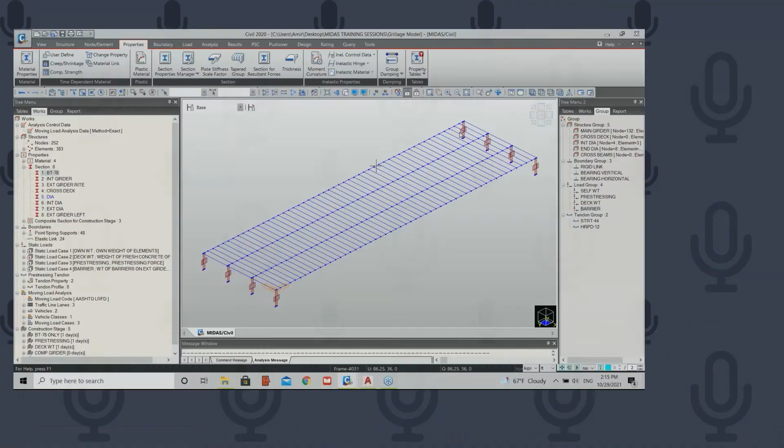All right, okay, thank you. So you can see my screen now? Yes, I can see your screen. Okay, so this is the first application that I want to talk about, and it's a very simple one. This way we can take the topic from simple models and move on to more complex models later.

So this is a bridge that I call an everyday bridge. It is basically a precast, pre-stressed concrete I-beam bridge. I want to focus the discussion of this model on the topic of construction staged analysis. I'm not going to go over every single definition in the model, but rather focus more on the construction staged analysis, how to build the stages, and what tips or things we need to include to make sure we have a correct definition for the construction staged analysis.

So this bridge basically consists of 4 bulb T girders. You can see this is the cross section of the bridge. Those are bulb T78 girders, and they are 4 girders spaced at 12 feet, and you have the concrete deck on top of that.

Of course, any finite element model has those steps - the basic steps you need to define for any model, including the materials for the model and the section definitions. For this span, for the deck, we have a 4,000 psi concrete material. We define this material here, including the modulus, the Poisson ratio, the weight, and the density. For the pre-stressed girders, we have a higher grade concrete material for the pre-stressing effect - 8,500 psi for this material. And I have a definition here for the pre-stressing strands used in the bulb T section, which is the grade for the pre-stressing material or steel used for pre-stressing.

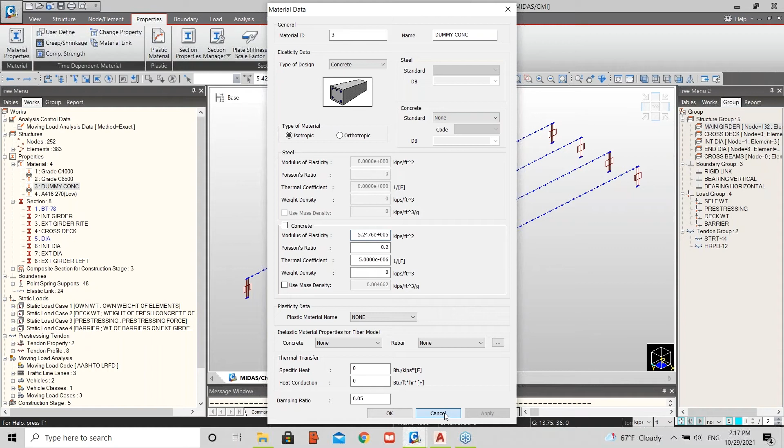Finally, I have a definition I call dummy concrete. It's no more than a concrete definition with a weight density equal to zero. I'm defining this because I'll show later in the model that this material can be assigned to any element when you want to include the stiffness of the element without including its weight. I'll describe this more as we move to the construction stages.

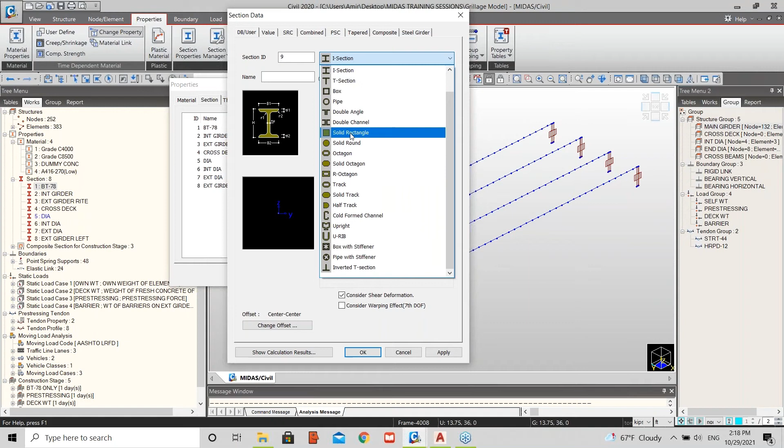For the section definition, we have a bulb T78 section, so we'll define the section for it. MIDAS has an extensive section library with all different types of sections included, from generic sections like steel, rectangular, and circular configurations, to steel encased sections where steel is encased inside concrete, with different configurations for I-beam encased in rectangular or circular concrete sections. There are also concrete filled steel tubes, which are popular for piles and other bridge elements.

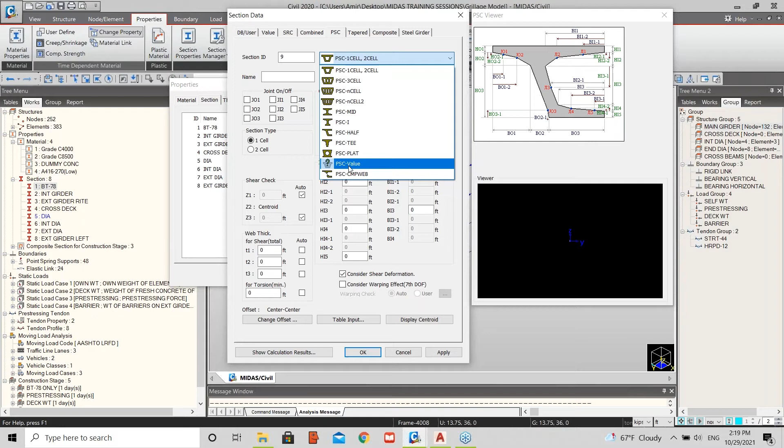Then there are combined sections, when you have two steel members combined together. The one we use most is the pre-stressed concrete section definition. This module is specific for defining box sections for bridges, including any number of cells, and can also define I sections or T sections, which are I-shaped pre-cast pre-stressed girders, or even any generic section where you input the properties directly, not covered by a particular embedded geometry.

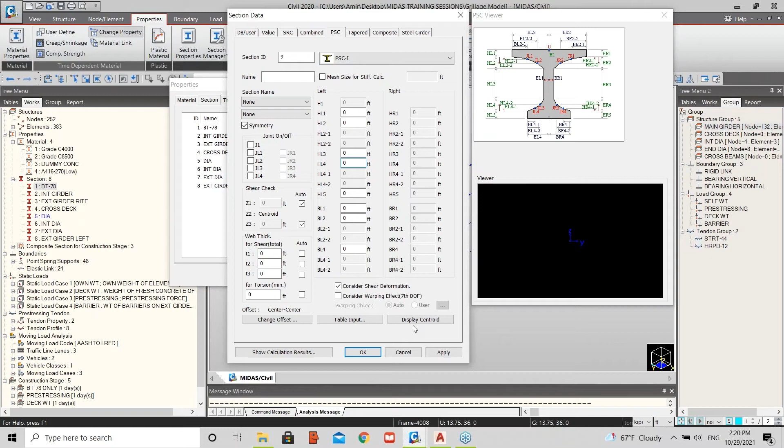For the bulb T78 I-beam, we usually use the I-beam section option. There's a guide figure with all the dimension definitions named, and all you need to do is input the numbers for the basic dimensions of the section, and that's how it's defined inside MIDAS.

Since those precast I sections will later have the deck or concrete poured on top, the two pieces become composite together. For defining a composite section, we go to add a section and select the composite section tab, which has different shapes including steel tubs or I-beam sections. For the concrete bulb T section, we use this one and define the properties for the slab, which are the basic dimensions of the slab and the haunch thickness.

Later, for the I section, you can simply import the bulb T section you defined earlier for the girder by itself, and that's how you end up with the composite section definition for the inner girder.

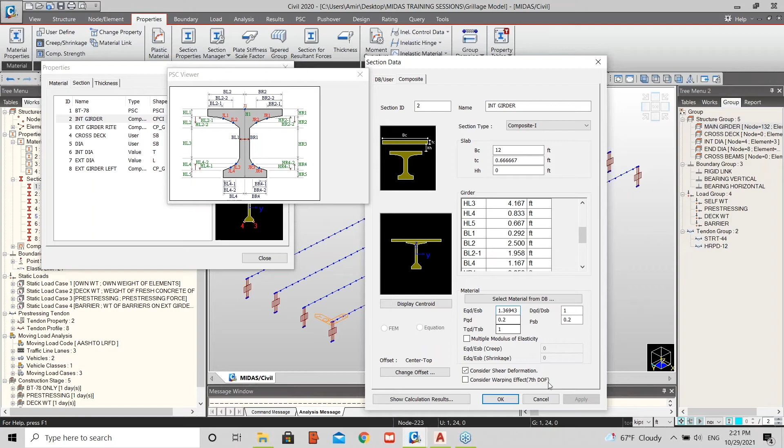One important aspect is to include the modular ratio, the ratio of the moduli for the two concrete materials - the concrete of the deck and the concrete of the girder. This ratio needs to be included because when MIDAS automatically calculates the properties for the composite section, we have to make sure the modular ratio is included in the calculation, since those are two different materials with different properties. To get the correct stiffness and correct inertia, we want to make sure to include this ratio.

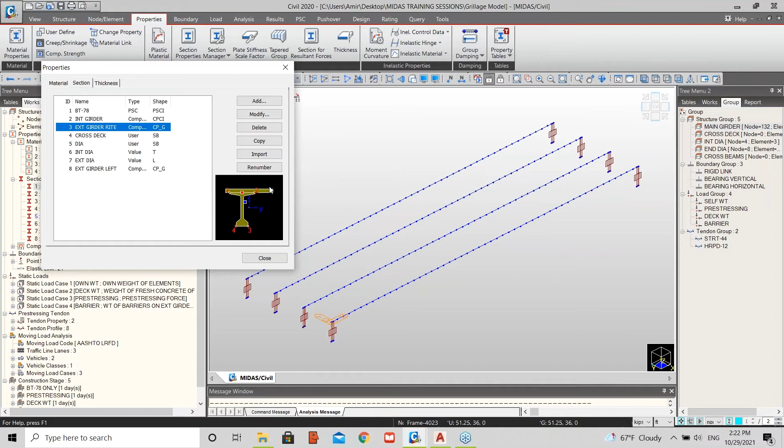This definition can be used whenever you have a composite section that is symmetric, like the case for the interior girder, where the deck is symmetric at the center line of the girder. But when you get to a case like the exterior girder, where the overhang length is different from the spacing of the bridge, you end up with an unsymmetric section.

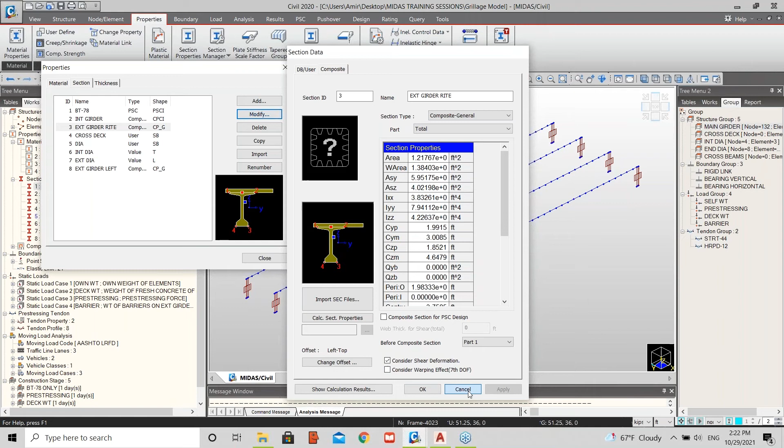This can also be defined inside MIDAS, as a composite general section. This option provides the capability to define any section with unsymmetric geometry, and it can be done in conjunction with the section property calculator tool inside MIDAS. Since I received many requests about this definition, I wanted to go over it quickly with you guys.

I think I had one here. Yes.

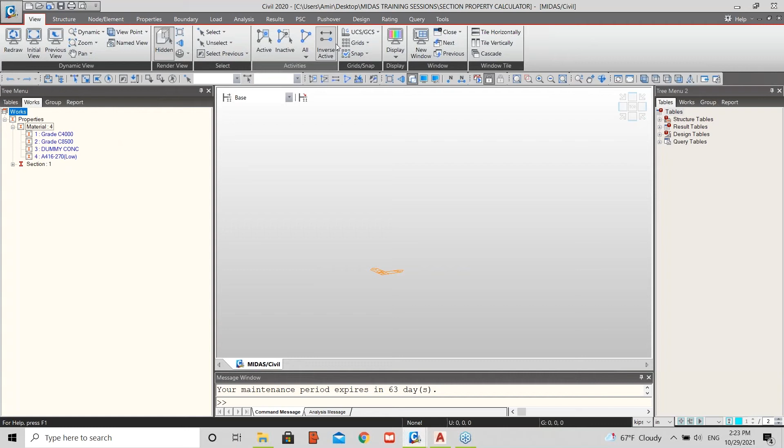Let's quickly go over how to use this section property calculator to define a section with irregular, unsymmetric dimensions. Let's say we have a MIDAS model. The first step is to define the materials inside the model, then go to AutoCAD and draw your section with the irregular or unsymmetric geometry that you have.

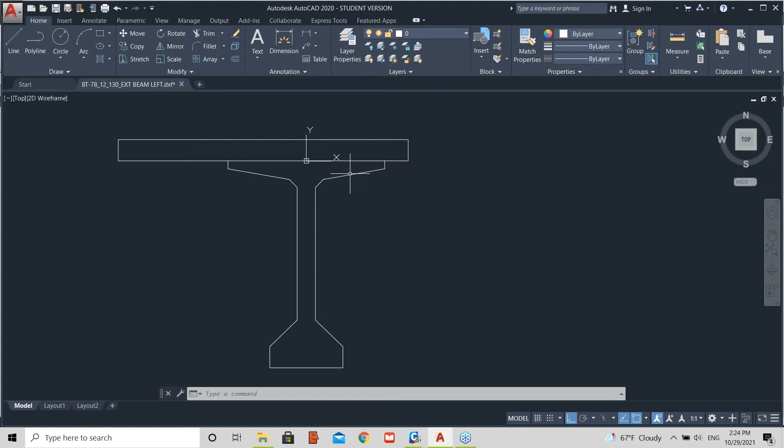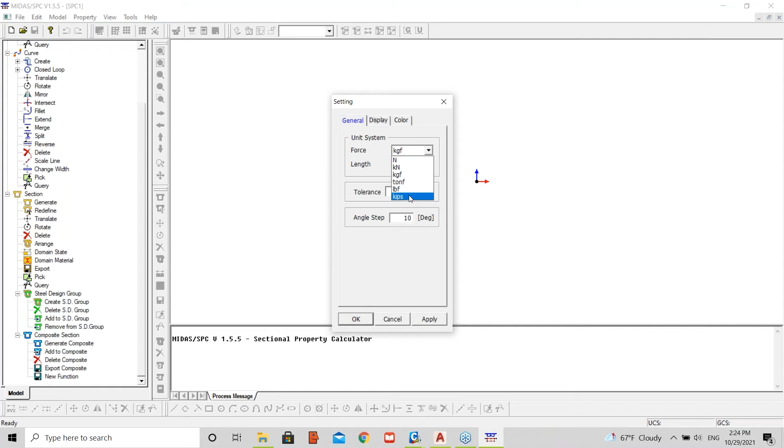Here I drew the girder and the deck together in AutoCAD and saved this as a DXF file. The important thing when drawing the section is to make sure what units you're using. For example, I used inches everywhere to draw the girder and deck together. Then you need to set the units here correctly to match the drawing, and go to Tools, Section Property Calculator, the brilliant tool inside MIDAS that you can use to create any geometry you need. Just set the units correctly, including kip and inch, and hit OK.

The other important step is to define the materials correctly, because this plays a role in calculating the properties and stiffness for the section later on. So we define the deck concrete material, just plugging in numbers as an example. We have a material for the deck, and another material for the girder, pre-stressed girder, including the modulus, Poisson ratio, and weight.

So we define the two materials we're using, and then you can simply import the AutoCAD DXF file, pick your DXF file, and hit OK.

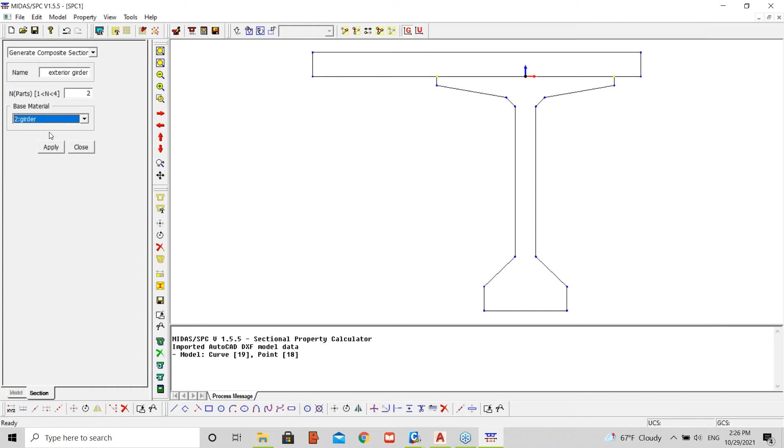This way you've imported the section inside MIDAS. Since this is going to be a composite section, you go to this tool, Generate Composite, and name it exterior girder. This consists of two parts: part number one is the pre-stressed precast girder, and part number two is the deck on top. The base material for the section will be the girder material, since that's the dominant material of the section. Then hit apply.

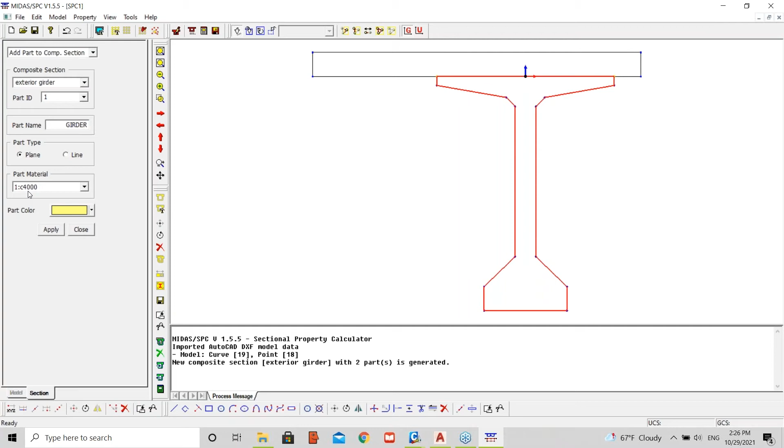This tells you the section has been generated. Then add to composite - that's the exterior section, so part number one is the girder, pre-stressed girder. All you need to do is pick the shape for the girder, making sure you select the correct lines, then pick the material for the girder, the pre-stressed one, and hit apply. Then go to part number 2 definition, which is the deck definition, and name it deck.

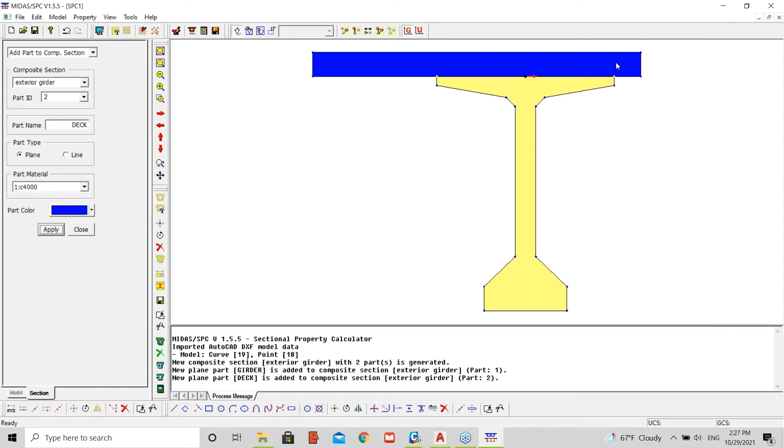Then you pick the deck and choose the correct material, and you can even choose a different color. I think I made a mistake in my selection, so we need to make sure we don't include wrong lines - just the correct lines in the selection - then hit apply. This way MIDAS understands that this portion is the deck portion of the section.

Then you go to Property, Calculate Composite Property, and put the mesh size. Basically, what this section property calculator does is discretize the section into small elements, one inch by one inch in size, and it calculates the property for every single part by itself and the property of the composite section as a whole.

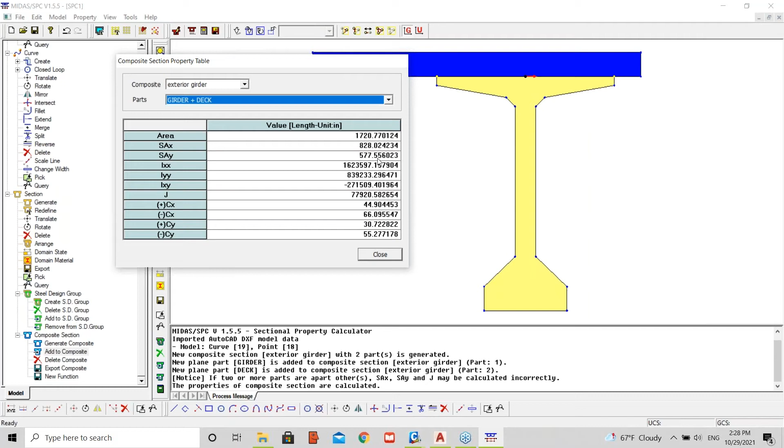If you display the properties for the section, you'll see the girder property - this is the yellow portion representing the girder - with area, inertia, and all different properties calculated. That's the deck properties, representing the concrete slab on top, and that's the girder and deck together - the composite section properties. This is how you define sections with irregular geometries inside MIDAS.

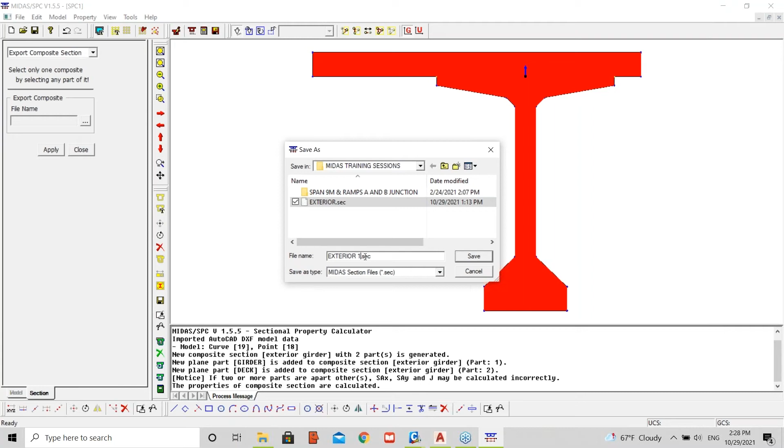And the last step will be how to export this composite section. You need to hit on export composite section, select the entire section, and name the file exterior, let's say exterior 1 or something, with the extension .sec, because that's the extension that's going to be saved inside MIDAS.

And after you do that, you can also save this section in SPC, the section property calculator extension, and that's how you save it inside MIDAS.

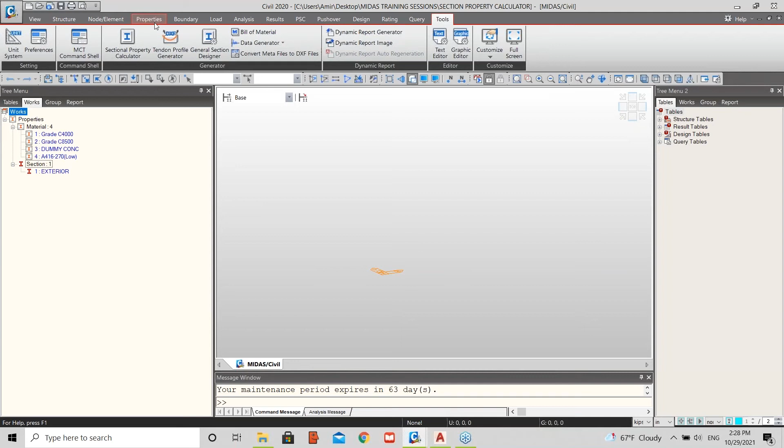Then later on, when you get to define your section, it is very simple. You go to define your composite section, hit on composite, and basically name your section. Choose the correct type, which will be the general one, because now we are defining a general section that has an irregular geometry. Call it whatever name you need, and then you import your SEC file, and that's the file that is saved.

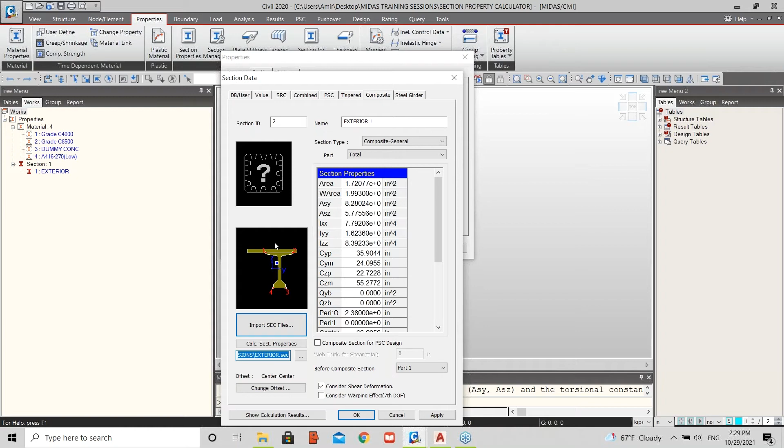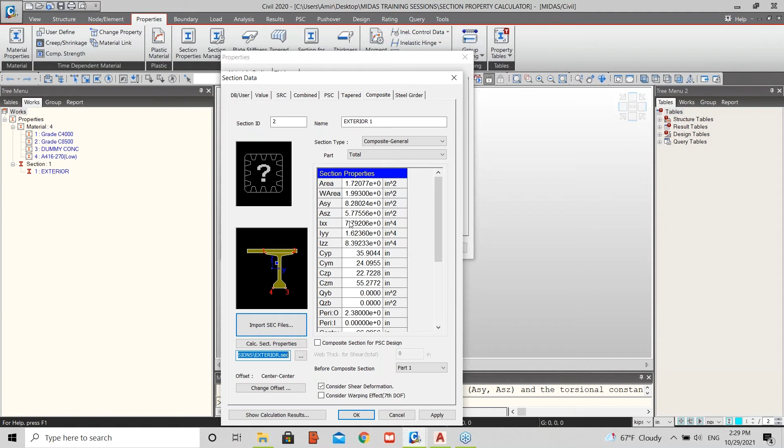And this way you end up with the section defined inside MIDAS. So MIDAS reads the section property calculator file, imports it with all the properties. Just make sure you are keeping the correct units while you do this import process, so you import the property with the correct dimensions and section properties as well. This way you can have your section defined inside MIDAS.

So that's a way that you can define irregular sections. I just wanted to highlight this because I received some requests from people to go over this definition together. That was the way I defined those exterior girder sections for the model, the irregular ones, this way.

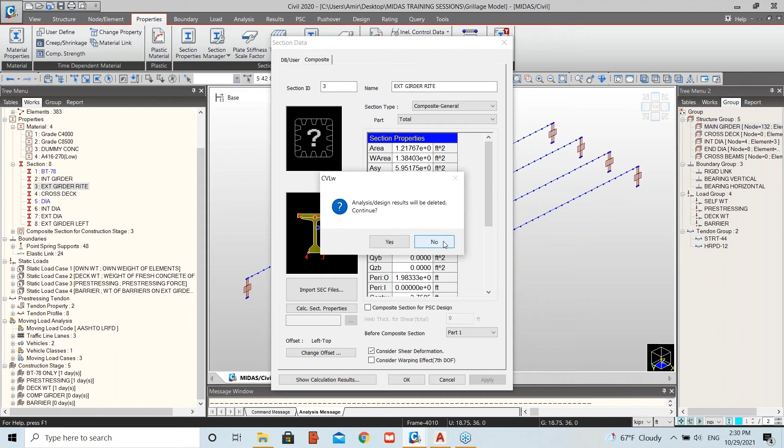And of course, we will have the definitions for the internal diaphragm and the exterior. So we need to make everything active, make sure we activate all the model. This is the interior diaphragm, just a rectangular section, and the exterior diaphragms, which are the external ones.

After we covered this part, we defined all the sections inside MIDAS. Of course, we can go and start defining the geometry of the model. For the geometry, you have tools to draw and create nodes with coordinates. If you hit on this, you can create all the nodes you need using coordinates, and create the elements by drawing the element joining from one node to the other.

So this is one way. And of course, when you create the element, you can pick the material and the section right away to define your materials and sections for all the elements. So that is a useful way to do it.

Or, of course, MIDAS also provides the option that you can import a DXF AutoCAD file. So you can draw the geometry for the span, including the main girders, the cross elements, the deck elements, the diaphragms, all different elements inside AutoCAD, and just import this AutoCAD file inside MIDAS. This way it can save you considerable time when building the geometry of the model, especially if this model has curved geometries or an irregular bridge model.

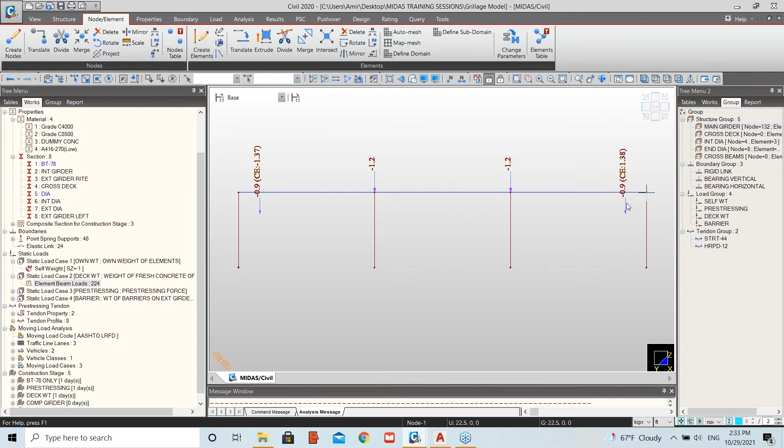Also, MIDAS has the option that you can define the load eccentric from the girder if needed. For example, for this particular case, the exterior girders, the deck is not symmetric with the girder, so we have some eccentricity that is applied here in the deck weight to account for this eccentric load.

The third load case created is for the pre-stressing effect, defining all the tendons or strands inside the model and adding the pre-stressing force in a separate load case. Finally, a load case is added for the barriers, which are the two barriers applied at the edges of the bridge.

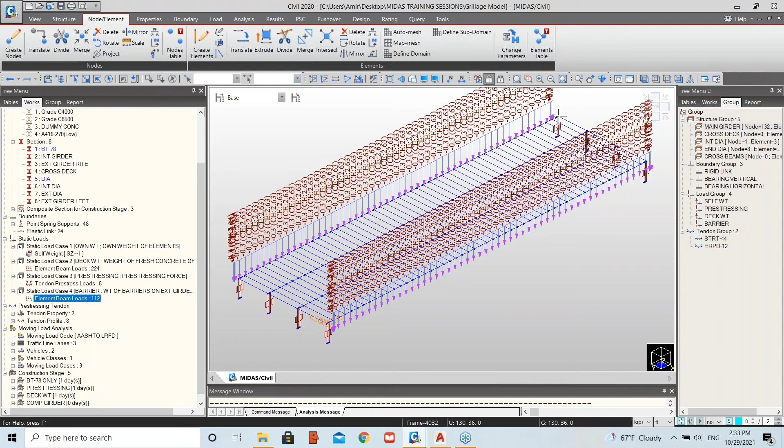The barriers are applied eccentric from the exterior girder because that is how they are applied in the actual condition. So that covers defining the load cases.

At this stage, you are just building the model: adding the materials, adding the sections, building the geometry of the model, building all the load cases, and also defining the support conditions, which is really important in any finite element model to make sure you have the correct restraints and links.

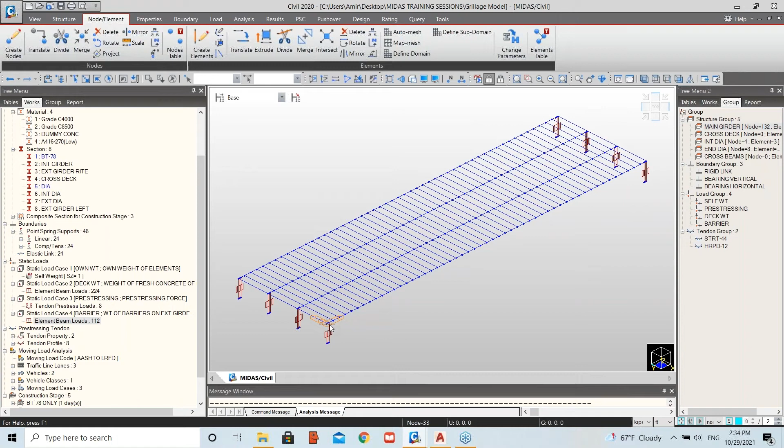For this particular case, since I'm defining the girders, I'm putting the frames at the top of the pre-stressed girder. So I had to define rigid links that represent the depth of the girder, with one node at the top of the girder and another node at the bottom of the girder.

These rigid links connect the frame element inserted at the top of the girder all the way down to the nodes which represent the support nodes. We usually use elastomeric bearings or some kind of bearings that have translational stiffnesses and rotational stiffness.

That's how we ended up defining the properties for the bearing. This comes from the type and size of the bearing and the modulus of the bearing material, which is how you calculate the stiffness for the vertical direction of the bearing.

I chose compression only to make sure the bearing does not operate under tension, because those bearings can only carry compression force. The only case where you can consider tension is if your bearing is anchored to the bent, which is not a common case and is done only in very specific situations.

Also make sure to define the boundary conditions, including the horizontal stiffnesses for the bearings in the two translational directions, X and Y, and any rotational stiffness you are interested in adding. You can add this in the boundary condition here.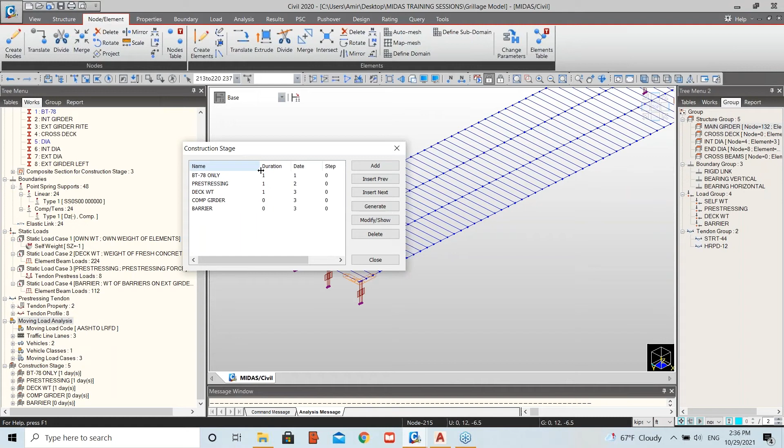Moving to the construction stages, which is the focus of this session: how to define the construction stages. You have to think about the stages the bridge goes through while it's constructed. I defined 5 cases that take the bridge all the way from the girder stage, when the girders are erected on the bents or pier caps.

For example, this first stage I call bulb T78 only, which is the girders only applied at this stage. Then I have a stage where I add the pre-stressing effect or pre-stressing force to the girders.

Then I have a stage when we start pouring the concrete for the deck and the diaphragms. I call this stage deck weight. Keep in mind, this is the weight of the fresh concrete applied on the girder only, on the pre-stressed girder only, but up to this stage the composite action has not been generated yet.

The section is not composite yet, it doesn't have the two components working together, the deck and the girder. It's just the girder applied only at this stage.

Then you have the composite stage, where the stiffness of the deck comes into play and the section performs as a composite section. Finally, you can have the barrier load, the wearing course, or any type of load that comes after and is installed on top of the girder. That's how the construction stage window looks.

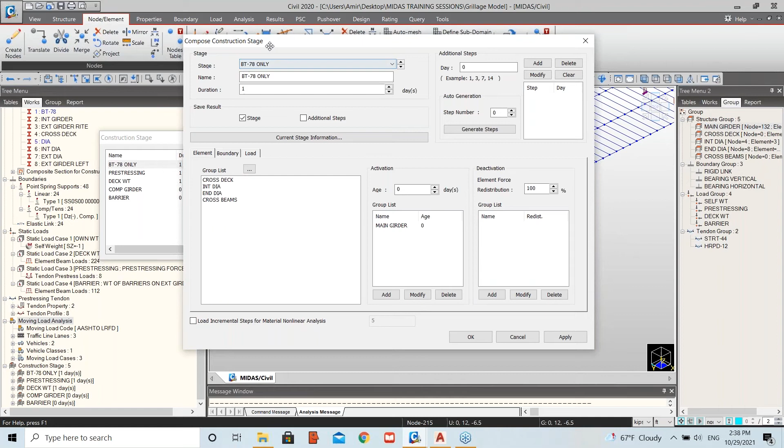And basically what you do is name the stage here at the very beginning, and there are three basic components in defining the construction stage.

First of all, what element is going to be active in this stage? And by element I mean a structural element, like a beam or a member in the bridge, a pier, a beam, a cross element, a deck element.

That's the element. It opens a list for you that includes all the elements defined inside the bridge, and you pick what element needs to be activated in this stage or deactivated in this stage.

Then you have the option to move to the boundary condition, and you pick what boundary conditions are going to be activated in this stage and what ones will not. And finally, the load - what loads are going to be included in this stage or deactivated.

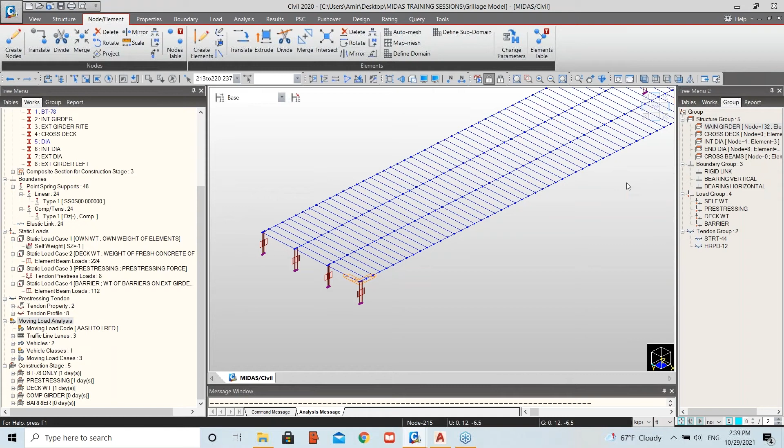To do this, MIDAS requires you, after defining all your model, building the geometry and including all definitions for material sections and load cases, to define what we call structural groups, because construction staged analysis deals with groups only - structural groups for all the elements in the model.

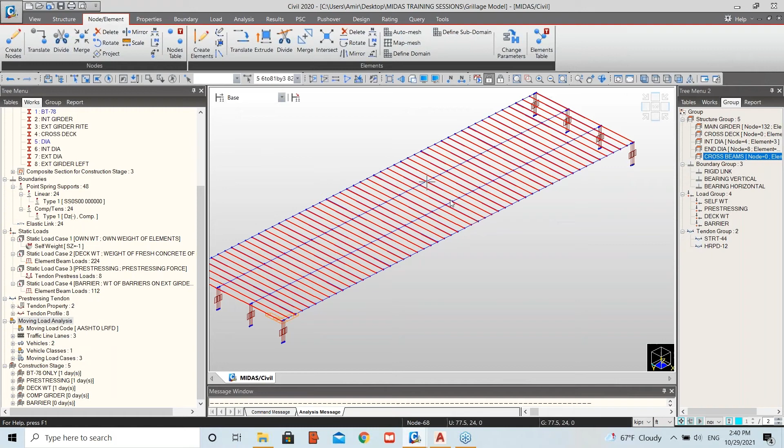So I defined a group called main girders, which includes the four bulb T girders. I have another group called cross deck elements, basically the deck elements defined here. I have a group for the interior diaphragm, a group for the exterior diaphragm, and one group that includes all the transverse elements - the interior diaphragm and deck elements along with the exterior diaphragms.

Similarly, you will have groups defined for the boundary conditions. So all the rigid links shown here are defined in one group I call rigid links, and all the support definitions for the bearings, including the vertical and horizontal stiffnesses, are included in those groups.

Finally, for the loads, you will have a group for the self-weight, all the self-weight of the elements in this group. Anything MIDAS is going to compute the self-weight for based on the material and section will be included in this load group definition.

We have a load group definition for the pre-stressing effect - all the tendons or strands as a pre-stressing load are defined in this group.

And we have a group for the deck weight - basically the uniformly distributed load I defined for the fresh concrete, the weight of the fresh concrete applied on the girders. The barrier load is also included in a separate group.

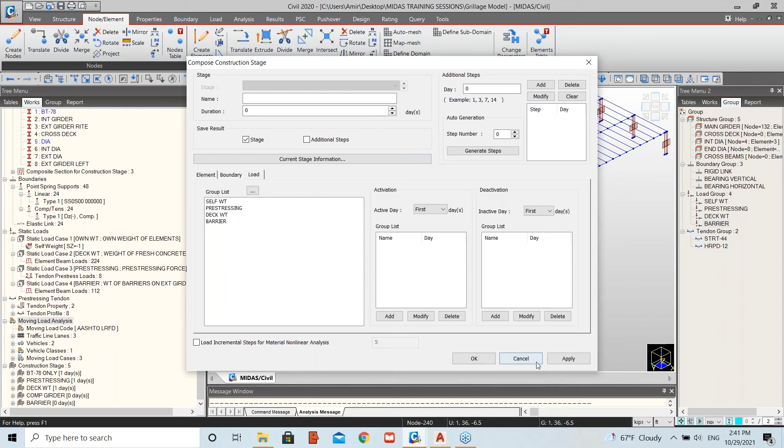The reason this group definition must be completed before moving to the construction stages is that when you define the stages here and add any construction stage, you name the stage, and MIDAS reads only groups here. So to define what elements will be active, you select the correct group to be activated, and the same applies for the boundary condition and the load definition.

Before running this model to look at the results, there is one more thing that needs to be defined, because this model is a grillage model - we use beam elements for everything, including the girders, the cross elements of the deck, and the diaphragms. So this is called a grillage model.

Remember, when we defined the sections for the girders, we had the interior girder section, which was a composite section. This definition is important for grillage models, and it's basically specifying in each section.

We know those composite sections consist of two parts: part number one, the precast, pre-stressed girder; part number two, the concrete deck on top of it. So you need to identify which part needs to be activated in which stage.

This way MIDAS understands that, for example, in the first stage we only have part number one - only the girder active in this stage. That's why I wrote part number one, having the material for the 8500 PSI, active in stage number one, which is the bulb T78 girders.

Then when we get to part number two, which is the concrete deck, this has a dummy material - I use the dummy concrete material to make sure that when this part is active inside the model, it's not going to calculate the weight for this part.

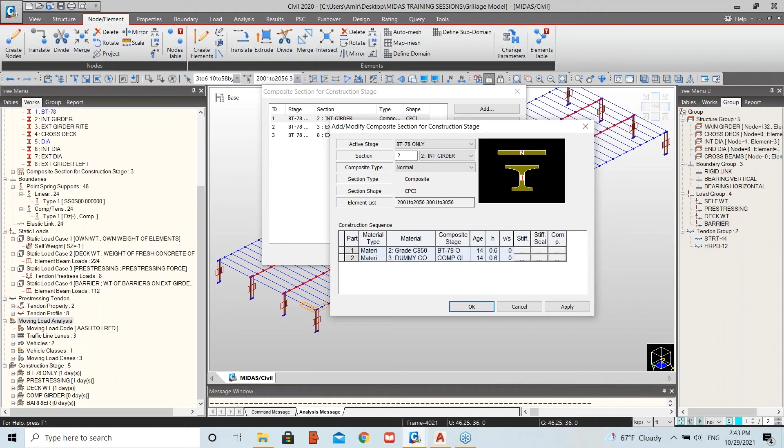This type of definition is very important to do before you run the analysis, to make sure that MIDAS understands which part is working in what stage. Then later on, we run the analysis.

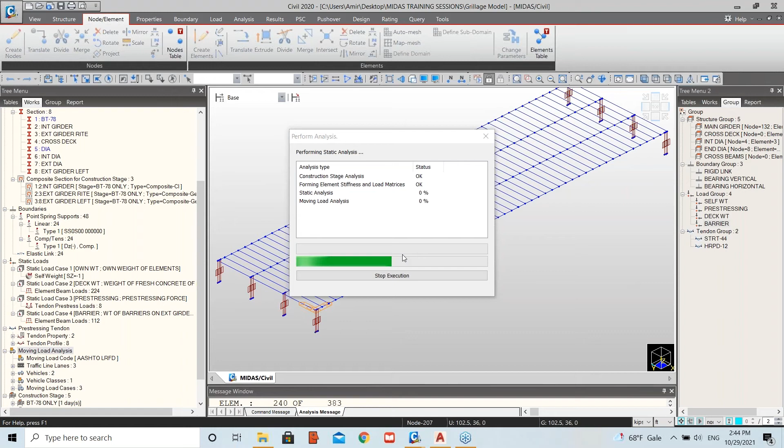Yeah, this should be actually faster, but that's okay.

So that includes all the analysis for the construction stages and the moving load analysis that's after, or the post-construction stages analysis.

One good check that you can do to make sure that you define the construction stages correctly, and that the correct parts are included in the appropriate stages of the analysis, is to display them. I'm just waiting on this to finish and we'll show you.

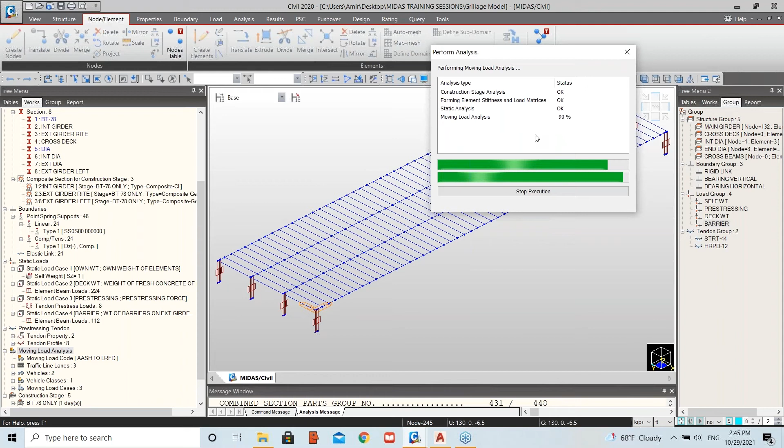So the good thing that you can do also to check that you define the correct parts is going over the construction stages. If we pick the first one, make sure that you only see the elements that should be active in this stage.

So in this stage, for example, BT-78, we should include the girders. Basically it's only part number 1 of the girder, which is the pre-stressed girder. We should also see the elastic links or the rigid links that we have and the nodes for the bearing. So if we display the nodes here, make sure that you see those elements only active in this stage. If you want to see an extruded view, you can activate this option here. So you can see clearly this stage only consists of the application or the erection of the pre-stressed girders on the supports or on the bearings.

Then you go to stage number 2, the pre-stressing effect. This is only going to show that the strands are active at this stage, or the pre-stressing effect is active at this stage.

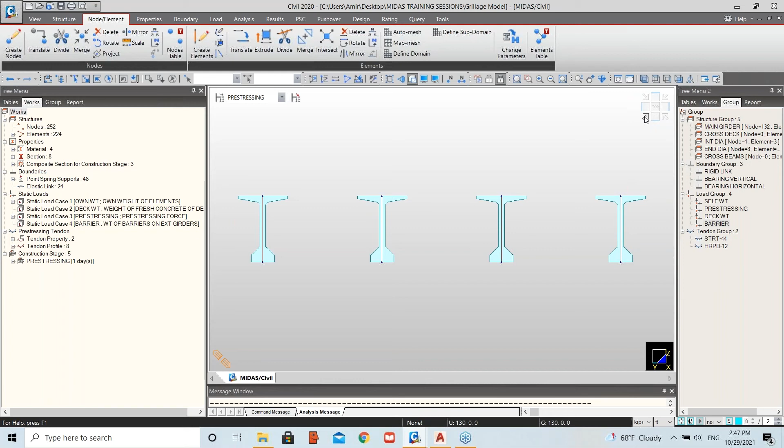Then you go later to the deck weight. The deck weight is only including the load, only the weight of the fresh concrete applied as a distributed load on the girders. So there are no elements that are active in this stage, it's just the weight of the fresh concrete applied on the non-composite section or the pre-stressed girder section.

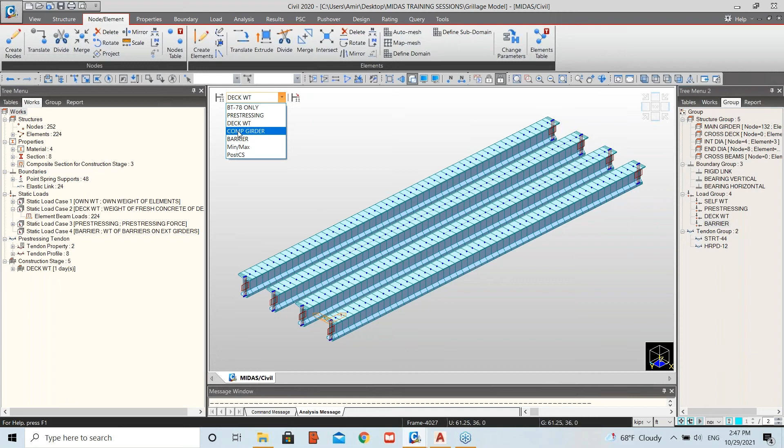Then when you go to composite girder, this stage is the stage where you see the transverse elements or the cross elements of the deck active, and that's why you can see now the deck is showing up, and also the end diaphragms and the interior diaphragm, all those elements are being activated at this stage.

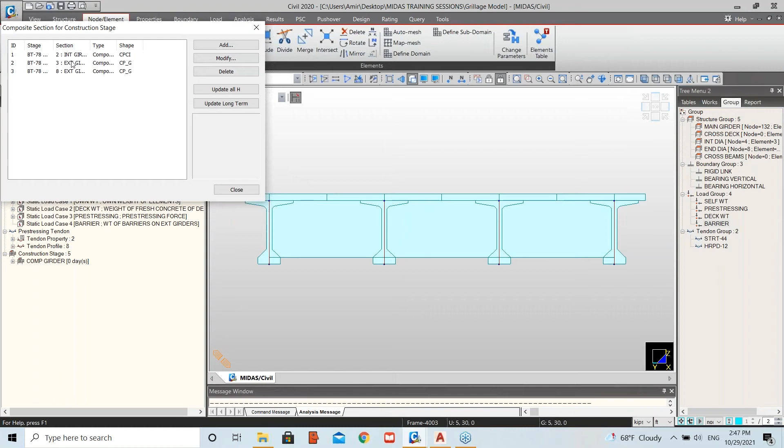And the thing that I mentioned earlier about how to make sure that the deck, when active, is activated only as stiffness and not as weight, is this definition here. When you define the components of the section and you define that part number 2, which is the deck, is going to be active at this stage, it is taking a dummy material, so it does not include any weight, it's just the stiffness of the deck.

And then finally, the barrier stage is just going to apply the weight of the barrier on top of the bridge. Of course, anything that you see post-construction stage is basically the live load effect or the moments from the live load.

Now, if you want to display the results, for example, see the bending moments on the girders for the different stages, you need to select the stage by stage and, of course, show the frame element view, the bending moment, and hit apply.

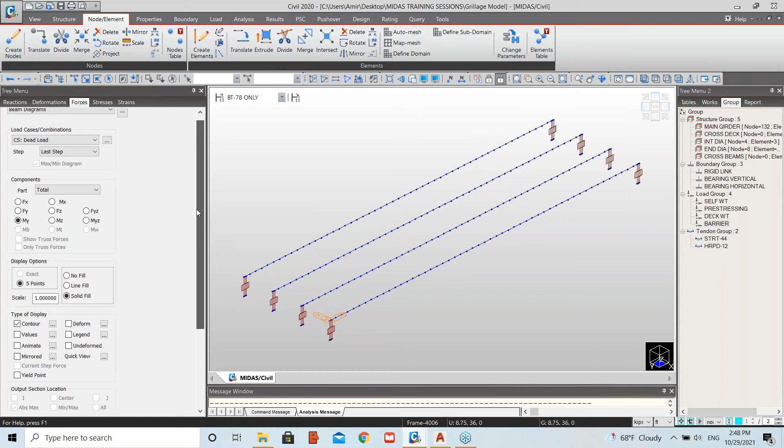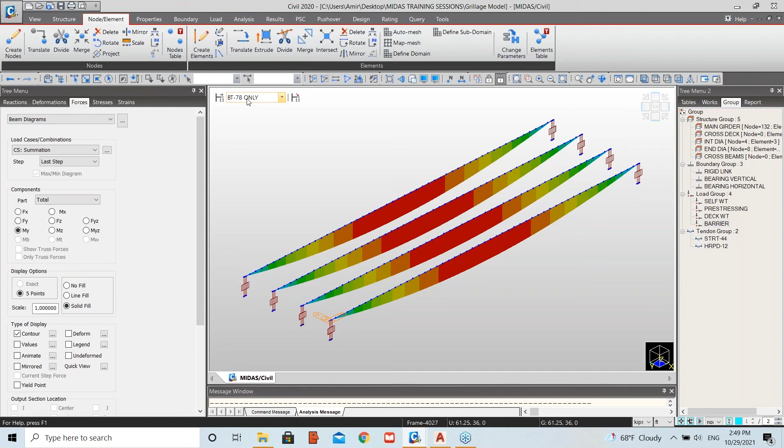So, for example, this bending moment here is a moment applied on the girders at this stage. There are two options here: either to see the moments coming from dead load only, or if you hit on tendon or primary, this is going to show you the pre-stress moment coming from the pre-stressing effect. And if you hit on summation, this is going to give you the summation or the resultant of the two moments, which is, of course, what we are interested to see. So at this stage, the summation is of course only the dead load, because the pre-stressing effect is not active at this stage yet.

But when we go to the pre-stressing here, you will see the moment shifted upwards because now the pre-stressing moment kicked in. This summation represents the final moment on the girder, including both the dead load, or the weight of the girder, and the pre-stressing effect.

If you switch to deck weight, you will see the pre-stressing effect is starting to reduce or decrease on the girders because now we are adding more loads or more weights. That's the weight of the deck kicking in and counteracting the effect of the pre-stressing.

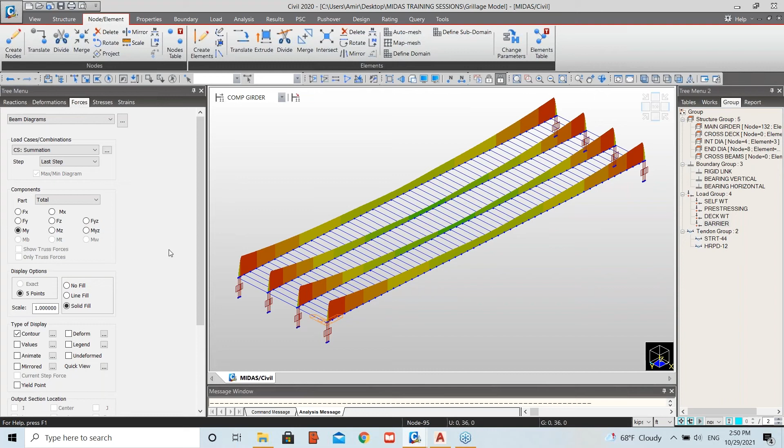And then when you go to the composite girder, this is where all those elements are active now, so the composite stiffness or composite effect is now active on the bridge. You will see there is no moment change between this stage and the deck weight stage. This moment is basically the same here because all those cross elements were defined in the model using a dummy material.

That's why we defined this dummy material here. You see all those elements have the dummy material to make sure that when those elements are activated in that stage, we do not include any weight. We are just including the stiffness and the transverse effect, the effect of tying all the girders together in the transverse direction. But we should not include the weight of those elements, because we have a load case where we added the weight of the deck acting on the non-composite section.

And finally, when you go to barrier, that is going to show you the total moment on the girder, including all the effects up to this stage, adding the barriers on the bridge.

Looking at the live load, you will need to go to the post-construction stage and display the bending moment due to live load. Select whatever case you will be checking and the moment, and you can display it. This moment represents the moment coming from live load only, not the total moment on the bridge. That's the moment coming from this case only.

If you want to see a combination, you can go under results, add the load combination with the load factors for dead loads and live loads, and display the total moment, including the dead load effect and the live load together. So this model here represents a grillage representation of a precast, pre-stressed girder bridge.

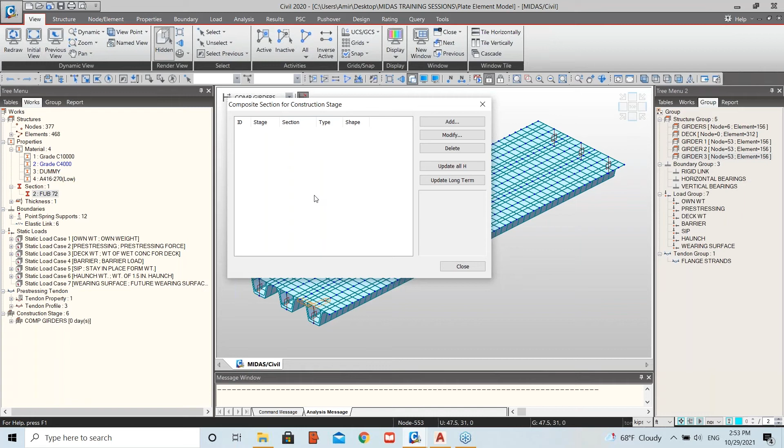Using these models with the plate elements, you still have everything defined, but the basic difference between this model and the grillage model is it saves you some time from defining the composite section for construction stage. This definition we showed before, with part 1 and part 2 for the section, is no longer needed here because we have defined the girder using a grillage model or beam element, and the deck is defined using a plate element or shell element. So those are 2 different elements in nature, and this is not one beam element or composite section.

And the important thing here, I'm just going to run the model to show a basic thing that we need to pay attention to while using the plate element models.

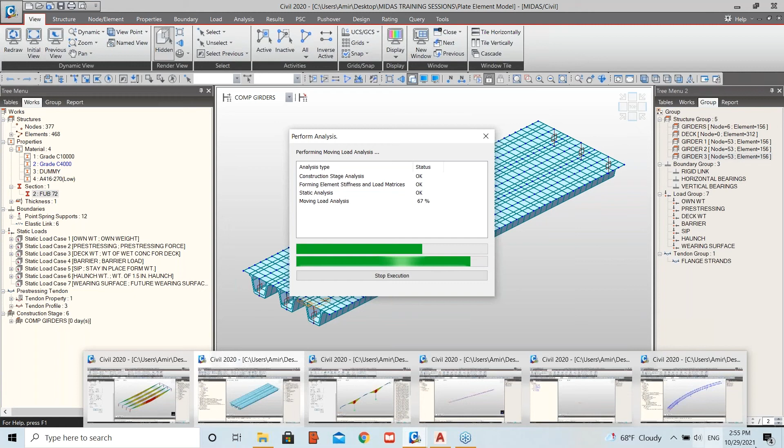Okay, so now it's close to finishing the analysis.

Now you see the definition here for the stages of construction, similar to the previous model. We just have a stage where only the U-girders are activated, and of course the support conditions need to be activated. Those elements are defined here using beam elements, so you can see clearly I'm using beam elements for the U-girder or U-beam definition.

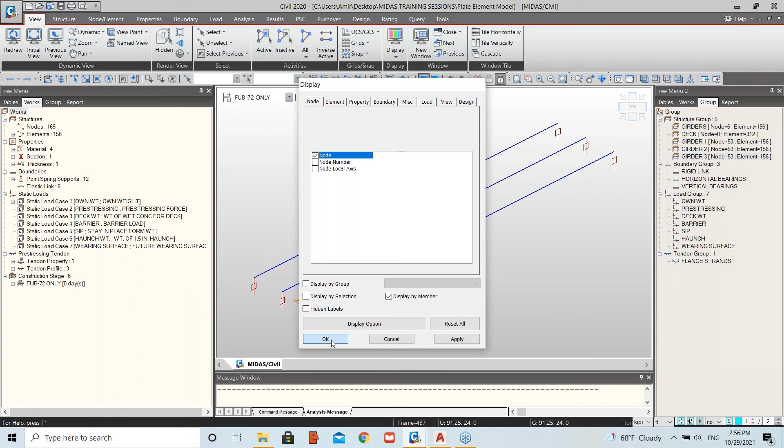Then after that, you have a stage for the pre-stressing effect, where I'm defining the strands or pre-stressing strands for the girders. Then a stage for the deck weight, after pouring the deck on top of the girders. This is just adding the uniform distributed load applied on the non-composite section. There are no elements active in this stage, it's just the load of the deck.

Then the composite girder stage, which is basically the stage where we activate all those deck elements to represent that the deck now is being poured and hardened, and now we have the composite section active. So we have the stiffness of the deck added to the girder, and now the composite section is performing at this stage.

Another tip, it's very important when you define the plate elements here to use a dummy material. Make sure that you don't have weight for the concrete for those plate elements, so when they are active at this stage, you just activate the stiffness but not the weight, since the weight is already applied as a uniform distributed load applied directly on the girders.

Then going to the following stage, which will be the barrier load. So this is just adding the barrier load to the span, and finally the wearing surface or wearing course.

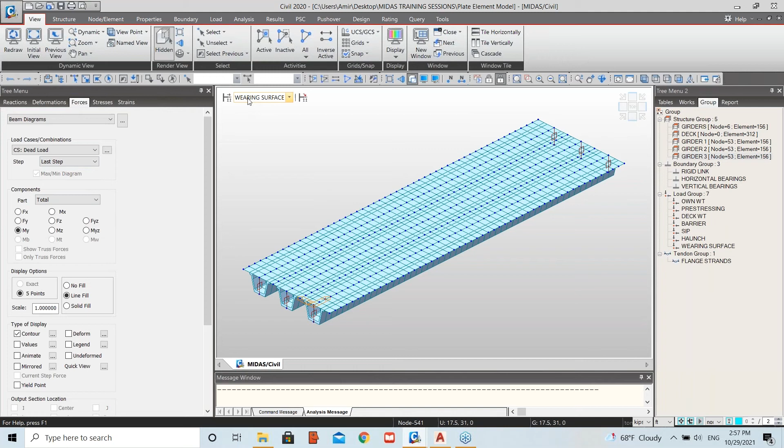One of the important aspects when you use plate elements inside the models is, when we display the beam, the bending moments on the girder or beam. Let's say the first stage here where we have the U-beam only active in the model, we'll just show the frame element. So that's the bending moment for the girders only, the girders only active at this stage.

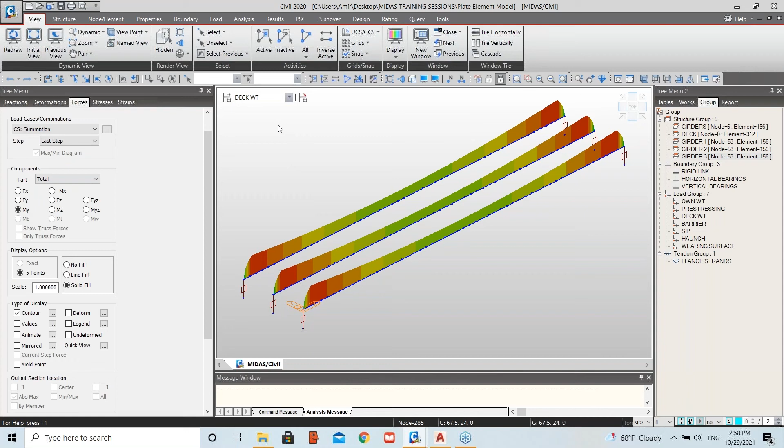Then the pre-stressing effect. You want to make sure you are displaying the summation here for both the pre-stressing and the dead load effect of the girder. Then moving to the deck weight, you will now see the pre-stressing effect, even the moment coming from pre-stressing. Sorry, just let me display this.

So now you see from this stage where we have the pre-stressing and self-weight of the girders applied, then moving to the deck weight after pouring the deck, the moment reduced on the girders because the pre-stressing effect is now reducing due to adding more loads or weights on the girders.

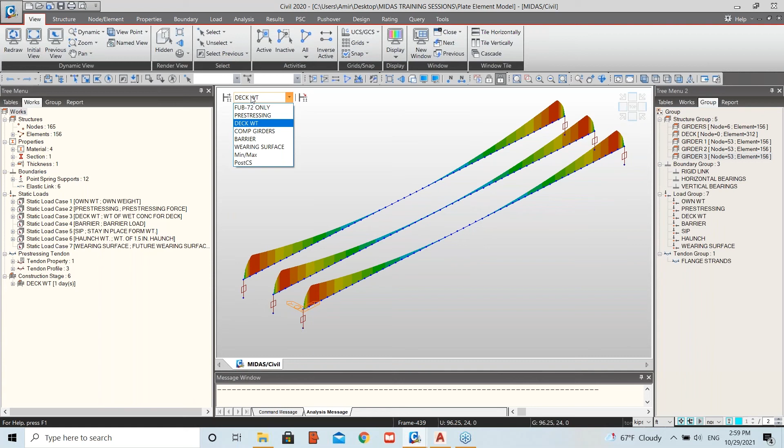So the deck weight kicks in, and then the composite stage when we added all the plate elements to the model to indicate that now the deck is hardened and we have the composite section in operation, with all those deck elements tying the girders together in the transverse direction. Then adding the barrier and the wearing course or wearing surface. That's how you display the bending moments to see the moments on the girders at each construction stage.

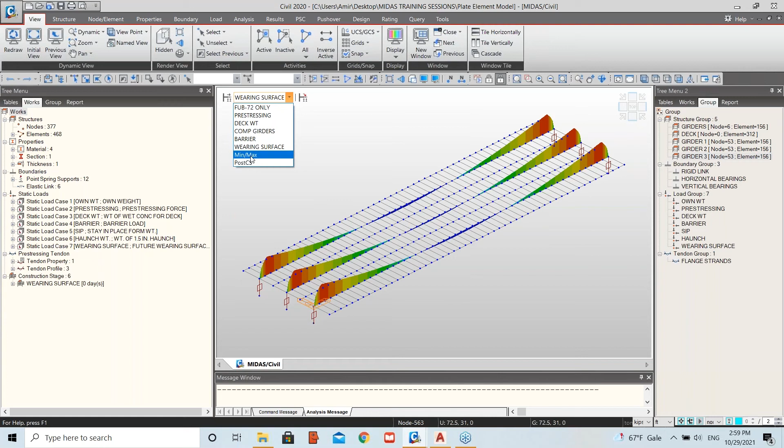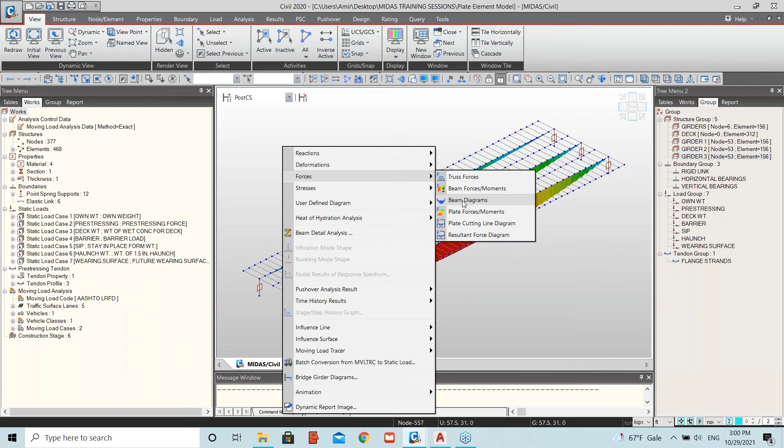The most important thing when you display the live load effect is, when you see the moments on the girders, you want to make sure you are seeing the moment on the composite section, not on the frame element or beam element of the girder itself. This option here, when you see beam diagrams, shows you the bending moment on the beam, but the live load effect is now acting on the composite section.

So to make sure we are seeing the correct moment, we need to define groups here where we define the beam elements for the girder and the plate elements surrounding it in one group. I'm calling this girder number 1, girder number 2, girder number 3, so I have the beam elements and plate elements defined in one group.

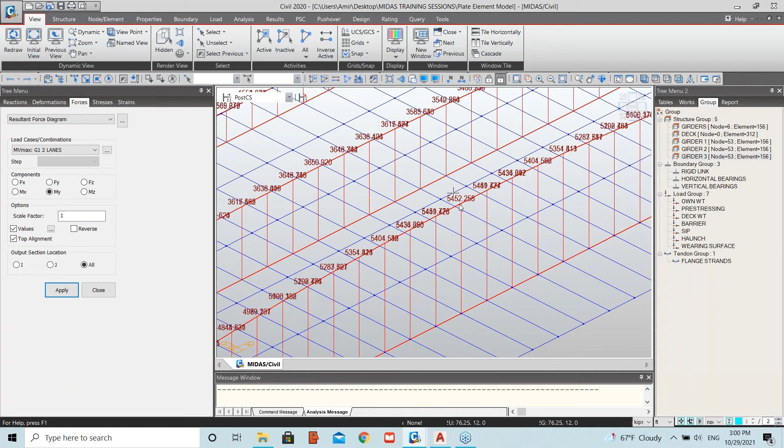MIDAS provides us with an option called resultant force diagram, which shows you the bending moment on the composite section, the plate element and beam element included together. You can pick whatever load case for the live load you are interested in, hit apply, and you will see the bending moments. Those bending moments are the moments acting on the composite section that includes the girder section and the deck together.

You see this moment here is 5,000 kip feet. However, if you go and display the moment from the beam diagram under this live load case, you will see the moment is a completely different number.

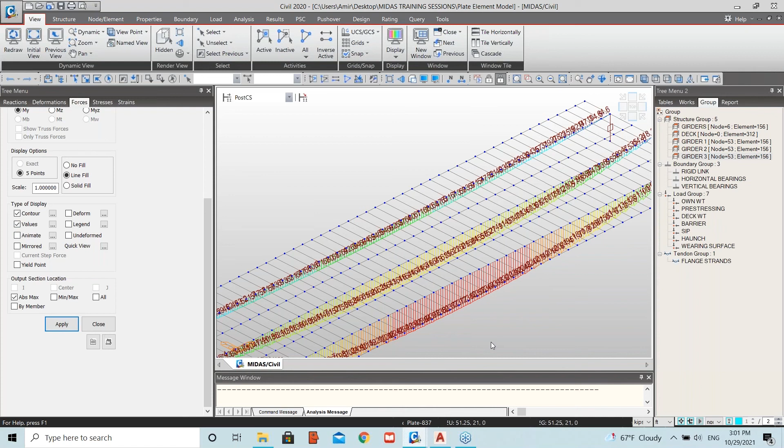That's only 2,380 kip feet. The other one was 5,000 kip feet. So it's very important to make sure that you are seeing the correct moment and displaying the moment on the composite section, not on the beam section.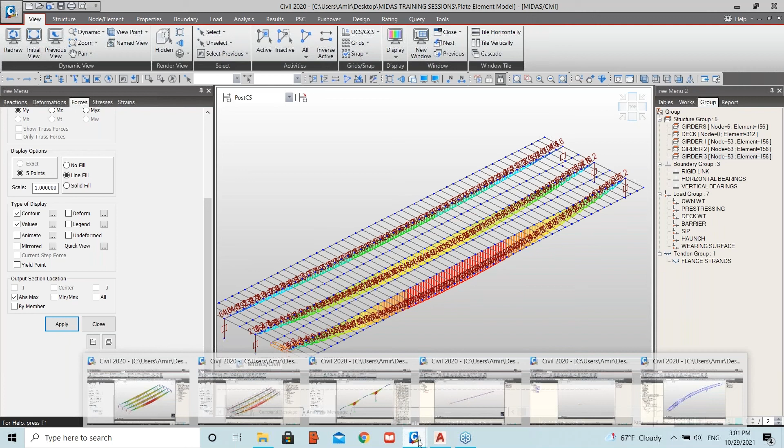All right, so now T2, I see now this is 3 p.m. So I had in mind to present two complex models, one for a 4-span continuous steel girder, and going over one of the segmental models, like the ones with the balanced cantilever. So I just want to make sure, do we have enough time for that, or you prefer to take questions?

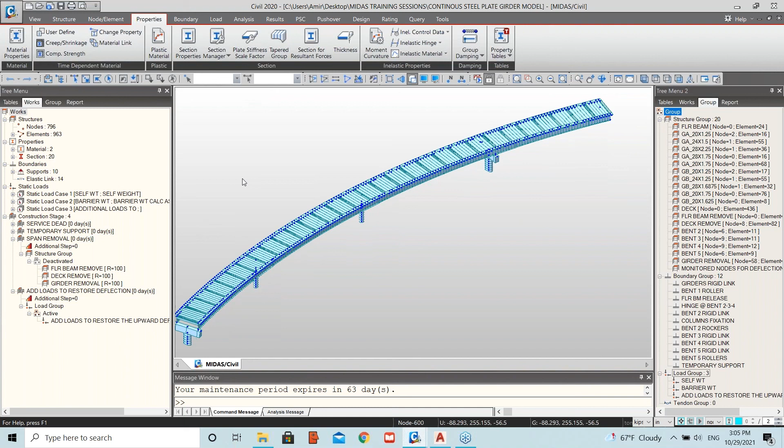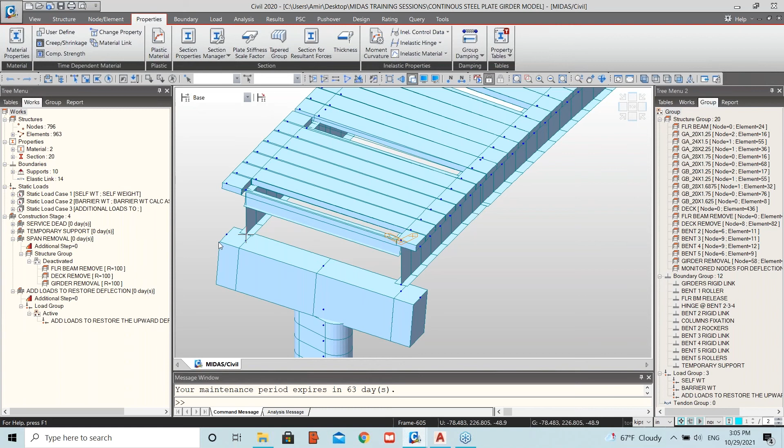And add to this that this bridge was really built in old days, and the plate girders were not composite. Those girders do not have shear studs connecting the deck to the beams or anything. So to give you an idea, the cross section for that bridge looks like this. The bridge consists of 2 plate girders, so that's not a redundant system. It only consists of 2 primary elements or main supporting elements for the bridge. So it becomes more critical when dealing with a bridge that doesn't have elements of redundancy.

And the system of that bridge is basically consisting of the main girders. So I can show the groups here. Those are basically 2 plate girders that are running parallel to each other, and they are curved. Those are the continuous ones.

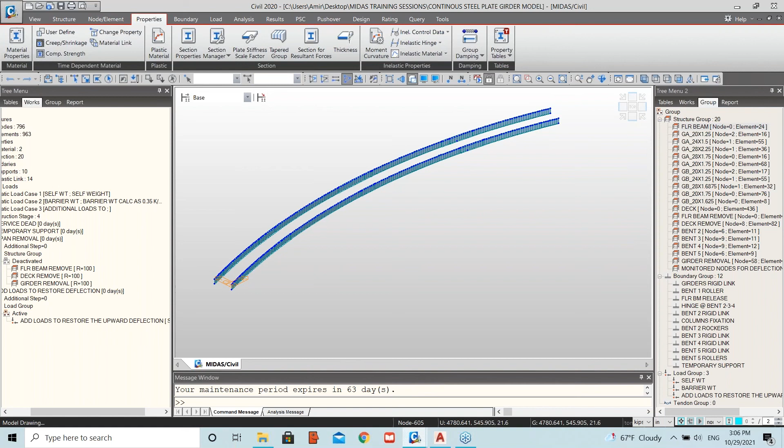And we have a system of floor beams that is tying those plate girders together in this direction, and we have the deck elements that are cast, or the deck is poured on top of that. So the deck is supported on floor beams, and the floor beams are transferring the load to the plate girders, and the plate girders are transferring the load later on to the hammerheads where they are supported.

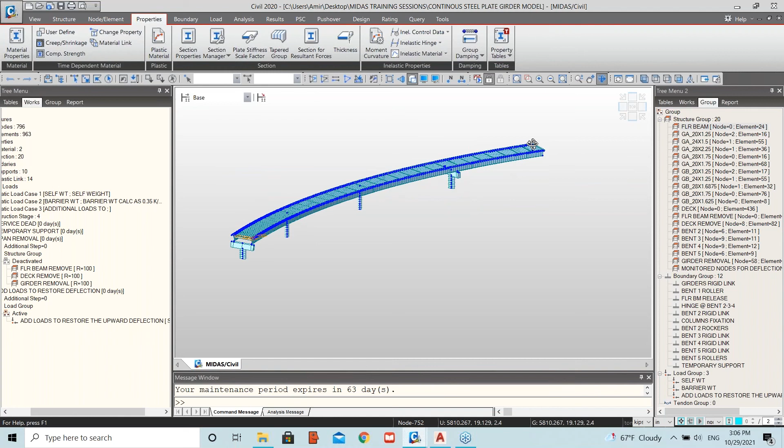One aspect about this bridge is that the condition between the substructure and the superstructure is different at every particular pier. For example, here the two plate girders are supported on bearings on the hammerhead, here and here at those two supports. Here, the bridge at the end is supported on an abutment, so they're supported on bearings on the abutment. Those two supports or substructures are monolithically attached to the superstructure.

So here we have the plate girders framing into the cross girder or the cap of those two substructures. All these different unique features about this bridge make it more complex to analyze and investigate how to build the construction staged analysis for repairing this bridge. I would say this is just repairing the bridge.

So to do that, first of all, you'll have to start by defining all the materials. Imagine yourself building the bridge in the final stage, the service stage. All the elements of the bridge included in the model, including the plate girders, the floor beams, the deck elements, even the substructures, like the hammerheads, the columns, the caps, everything, and include all materials, the boundary conditions, the load cases for the bridge, including the self-weight, the barrier, all different types of loads are defined. So as if you're defining the bridge in the final stage, in full.

Then I started defining the construction stages for the repair. How are we going to do the repair for the bridge? Starting from a stage I call service dead load. This is basically the bridge operating under the dead loads, because now we're repairing the bridge, so we close the bridge. The bridge is not allowed to have any traffic on top of it, so we don't have live load. It's only the dead loads of all the members of the bridge, so that's why I call this case service dead load.

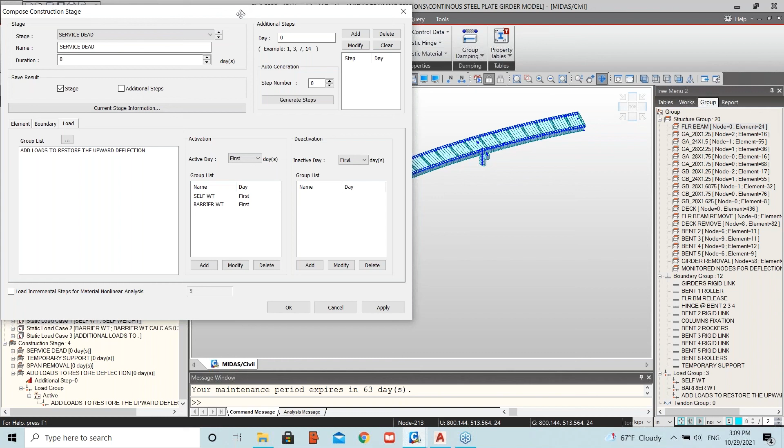This is defined to include all the groups of the bridge, including the substructures, the floor beams and the plate girders. All the elements are active at this stage. And of course the boundary conditions, we have to make sure we're including all the boundary conditions at this stage, and also the loads, including the self-weight and the barrier, because those are the only loads applied on the bridge under dead loads. So this is the first stage that is defined.

Amir, can you hear me right now? Amir, I think this part is really interesting, and I was thinking maybe we should do another workshop session for this part, because I believe all the attendees want to learn about this section in a separate session, so that way you can be more focused and dig deeper into this section. Do you think it will be feasible to do it? Yeah, of course, I don't have a problem, definitely. This model is really very interesting, like you said, yeah, and so I agree with you.

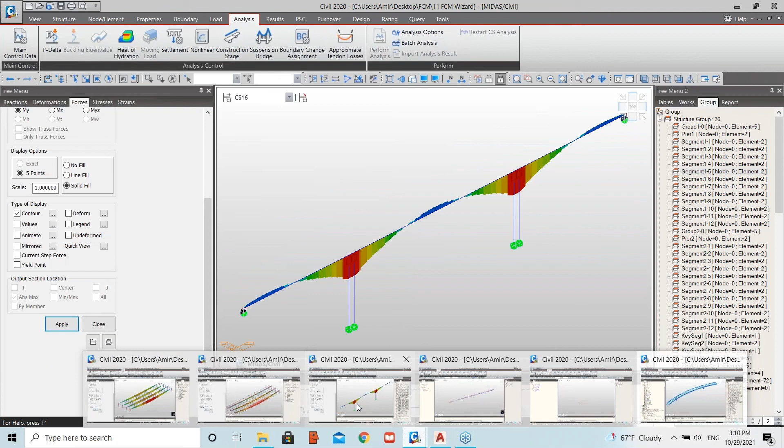But yeah, features that you don't see every day, about span removal and girder removal. So I just didn't want to start with a model like this before giving some background about the basic and simple models first, to introduce the topic of construction staged analysis on simple analysis first, before jumping to more complex models. Yep, I see, I agree with you. And that's why I think this will be really exciting for us, and I think we should do a separate session for this, so that way you can explain it with deeper explanations, and the audience can also focus on this interesting case.

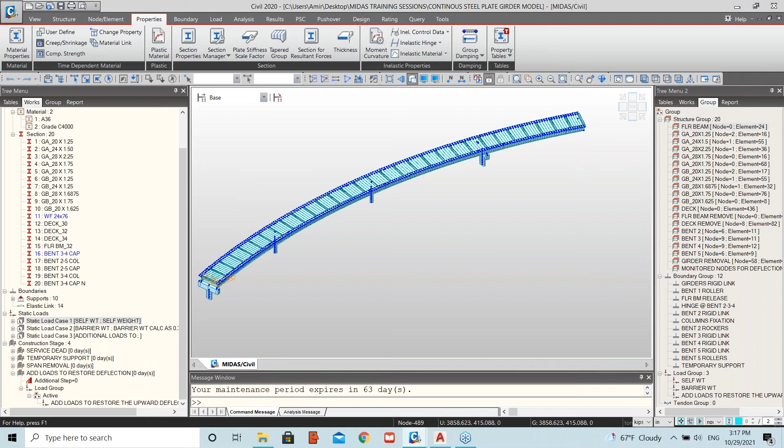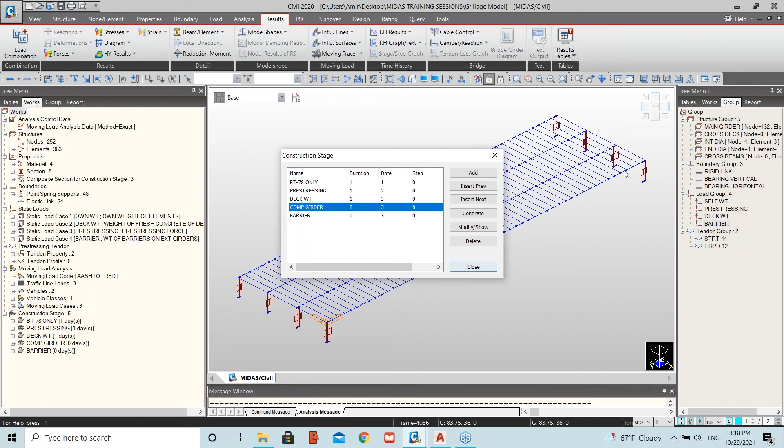For example, when I build the construction stages, I know I'll have a stage where only the girders are active, so I need a group containing only the girders. For the pre-stressing force effect, I'll need a load group including the pre-stressing effect. For the deck weight, a load group considering the deck weight. For the composite elements, a group considering all the diaphragms and cross elements needed for modeling the deck. That's how I figure out how many groups I need.

Defining the group itself is very simple - you define a name for the group and pick all the elements that go inside it, highlight the group, and assign them inside it. Once assigned, the group includes those elements.

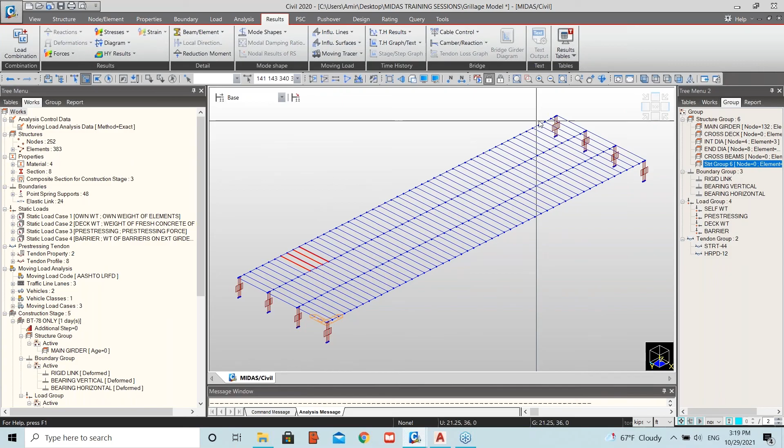Yep, I think that's really clear, Amir. Thank you so much for that.

Okay, next question from Jordan: Is it possible to define different load combinations for each construction stage? When I have tried this, it will only let me view results from individual construction stage load cases, but not load combinations involving construction stage loads. So is it possible to define different load combinations for each construction stage?

I think I've had this application in one of my models before. I think this is possible, I just need to dig it out here. Sorry, if you don't mind, I'll just add a few comments.

For Jordan, if you had trouble seeing the load combinations, it's probably because your load case type is specified as a non-construction stage load case type. In order for your loads to properly show combinations, the load case type needs to be CS when you define the load cases. If you're using just dead load, DW, DC, things like that, it won't be recognized by the program as construction stage load. If you define the load case type to CS or construction stage, you'll be able to see them properly in the construction stage, as well as the load combination.